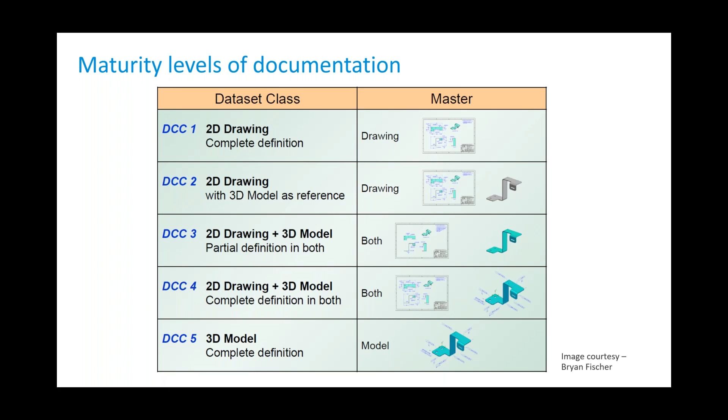So Anton, could you kick off the first poll? Launching the first poll, and do you mind rating your approximate level of GD&T adoption? The options go all the way up to full adoption of GD&T technology. Please just click on the screen, and I will share the results in 5 seconds. Okay. About to end the poll, and here are the results for everyone.

So as you can see, mostly the audience is in early stages of the journey. So probably it makes sense to also say a little bit more about what it is, how it works, and how to get on the path. Certainly, yeah. So I'll talk about that real quick, and then we'll move into some of the definitions.

GD&T, as we understand it in America, is geometric dimensioning and tolerancing. In the ISO standard, and in Europe, I believe it's referred to as GPS. But basically, rather than traditional dimensions and hole notes and so forth, it's symbolic-based tolerance specification, and that technique using GD&T has a pretty long history and a pretty robust set of standards behind it in both ASME and ISO.

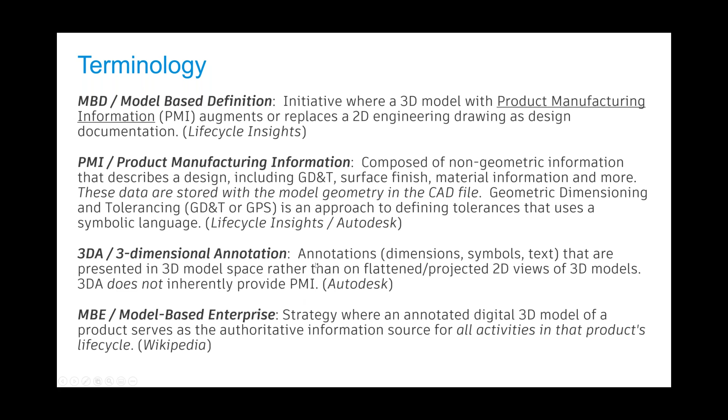So just a quick history of how Steve and I have been contributing to the MBD solution during our time here at Autodesk. 2005 was the first time that I ever heard the term 3DA, or understood it as a priority from our business leaders. And we actually spun up a team in 2005 and started investigating where the industry was and what our customer requirements were.

And like a lot of projects outside Autodesk, that project was started and then scoped really before it ever got going. But we did learn that we wanted to be able to give users the ability to manage 3DA visibility and camera views, save camera views using view representations as was available in assembly.

So as a result of that initial project, we ended up getting design views put into parts in Inventor R11. The project got started again in 2008 with a pretty sizable team, both Steve and I involved, and that project was scoped before we could ever release anything. Although as part of that effort, the pretty substantial development team was successful in porting over a lot of the annotation architecture and object models that were in 2D and getting them moved into the 3D space. So while we didn't create anything customer facing, we built the foundation for our MBD solution during that time frame.

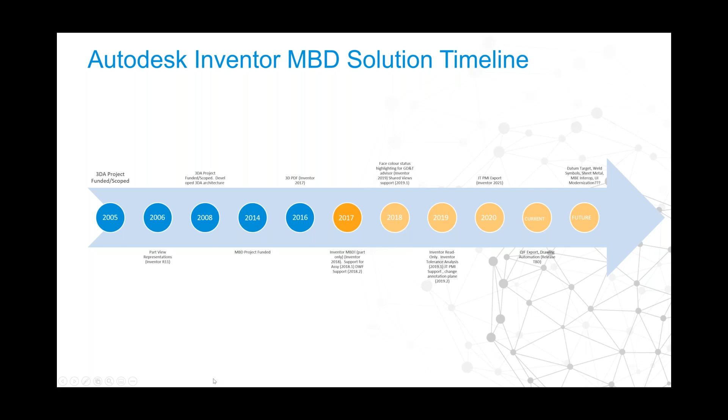Steve, anything to add? No, good overview of the development cycle here. It seems long, but it is long. Yeah. But there is something in the product today. It's usable. Yeah, fully functional.

And it's time for the second poll, just to understand where you are with Inventor's implementation of 3D annotations and MBD. Have you tried it or not? Do you use it frequently? Just click on the screen. I'll keep it open for 5 more seconds and then share the results with everyone. Okay, so I think that we're good. Let me close the poll and share the results. They're pretty in line with the first poll. So the level of adoption is relatively early, right? With just 14% using MBD on a more or less regular basis. Okay, so this is good information for us for the next slides and the accents that we add. Good. Let me give the stage back to Andrew and Steve.

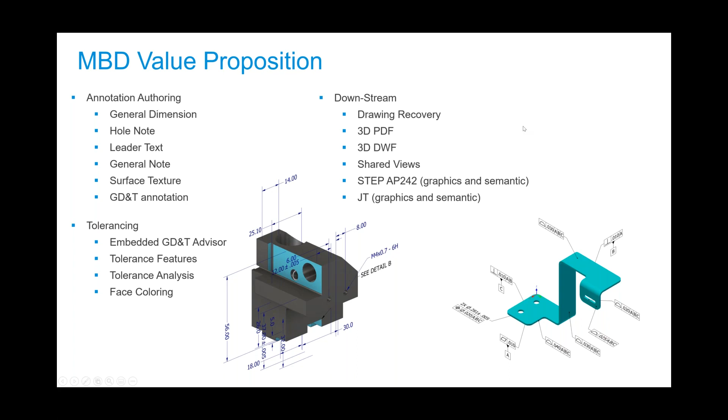So here we are again at the dataset classification code table. I just want to mention that this image here comes courtesy of Bryan Fischer. Bryan Fischer is a GD&T and model-based definition consultant out of the Portland, Oregon area. He's done a lot of training on GD&T. He sits on the ASME board and is responsible for developing a lot of standards around model-based design and model-based enterprise.

So the ASME Y14.100 is basically the engineering drawing specification. It's been around for quite a while and encompasses the MIL standard around drawing documentation. And these details here, Appendix F, were added in the 2013 version. There is a 2017 version available.

I don't have a copy of that, but I'd encourage anyone interested to get a newer copy and review it. This basically acknowledges, from a standards standpoint, that 3D models are a valid replacement for 2D drawings as the single source of truth, your company's manufacturing currency, so to speak.

What we hope to do is provide tools to get you to any one of these classification codes beyond number 2, where I expect everyone is at today.

A lot of people are here because they think they want to go drawingless. Just going drawingless is a big motivation factor for a lot of people who approach these tools. It's really much more nuanced than that.

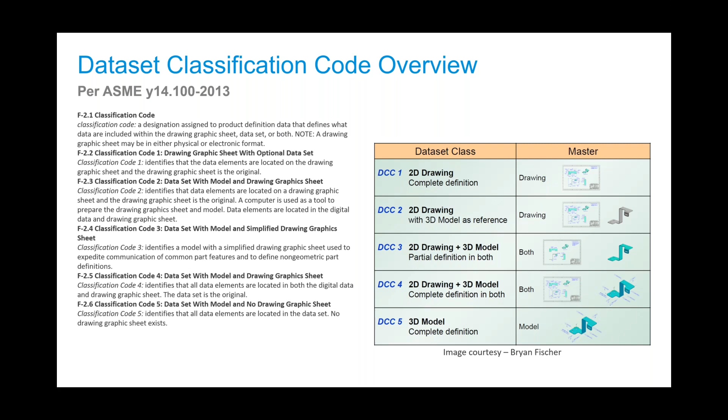Okay, last poll, Anton, if you will. Yeah, last poll based on what Andrew just shared. As an aspiration, where do you feel you want to be, and where does your company want to be, in what classification code or maturity level are you trying to get to?

Okay, good, we're really close to closing the poll and sharing the results. Let me do that. It looks like the biggest percentage of the audience is voting for maturity level 4, which is still full definition in both 2D and 3D. So 2D remains important for the audience.

Good, thank you, no surprise there. That's certainly in line anecdotally with what we understand from a few years of talking with customers, and that's good. Like I said, we are currently investing in making drawings easier to create if you've taken the time to invest in 3DA. Again, thanks for participating in that poll.

I'll wrap up here by referring you to some additional resources if you're interested. Action Engineering is another MBD consultancy, based out of Golden, Colorado. We've referred a number of customers to them. They have a lot of experience with MBD, particularly in the aerospace and defense industry, which has really blazed the trail for MBD adoption in the manufacturing market.

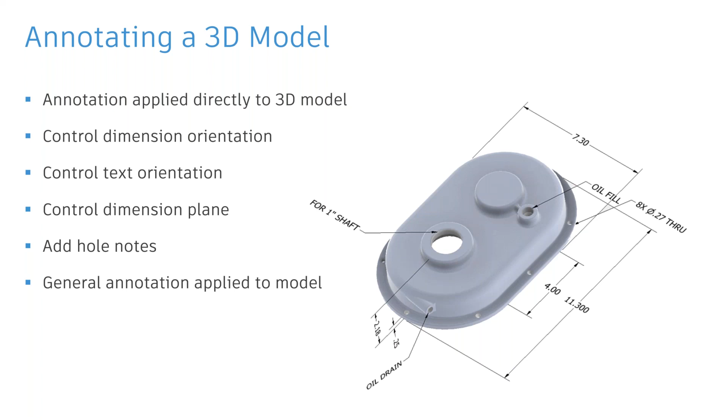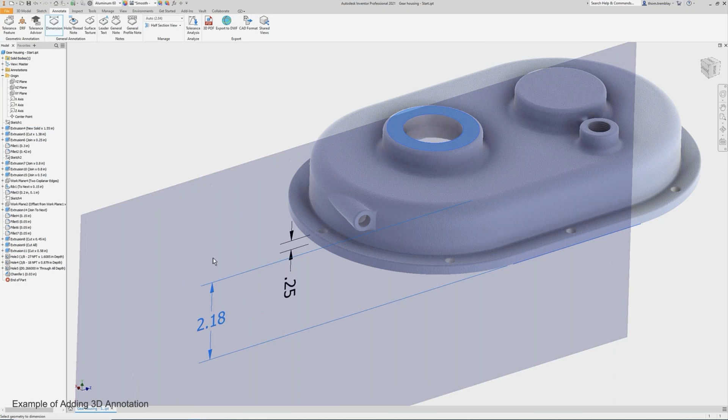Let's take a look at a couple of examples. For example, now we have one dimension. We'll use just the dimension tool from the Annotate tab. Clicking on an edge and a face will give you a dimension, just like you would get in a 2D document. In this case, it doesn't have the correct orientation I want, so there are some right-click overrides when you place the dimension that let you change the annotation plane, or there are keyboard shortcuts. Everybody loves keyboard shortcuts, so I can hold Shift and select the YZ plane, and it will set that dimension in place.

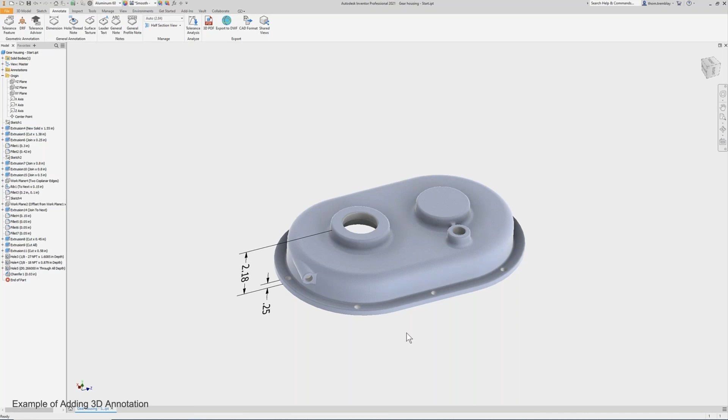You can build these dimensions out, and you can also change the position of them as they're applied. Let's take a look at a couple more examples. Selecting that edge again, we get a 4-inch dimension. Selecting another edge, we get a 7.3 width. So it's going to build these out, and you'll notice we're getting a menu in the upper right every time we place a dimension. We'll take a closer look at that with some other options.

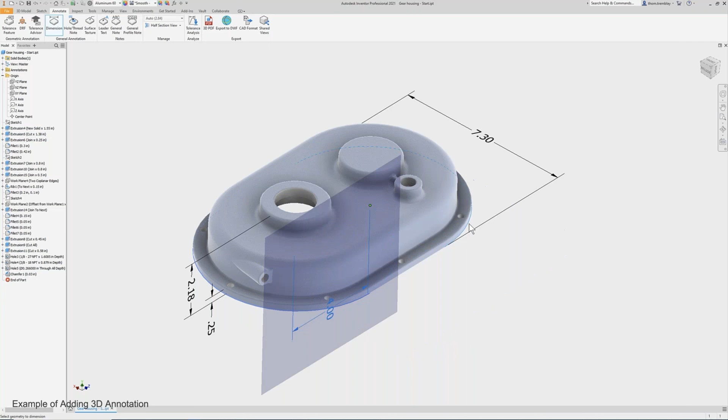Now what I'd like to do is get an overall length, since I'm trying to illustrate this for a customer. I select a curved edge, I get the radius. If I select the other curved edge, it's going to find the center points. Using the Shift key, I was able to change the orientation of the dimension itself, but that's not the dimension I want.

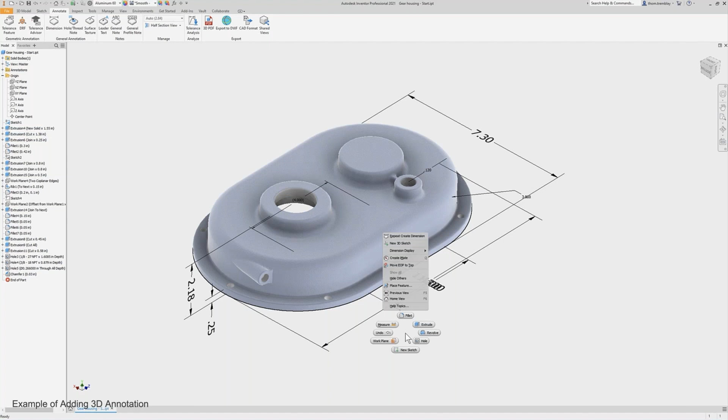However, the dimension I want is available in a sketch. So if you access your parametric sketches, you can promote dimensions directly from the parametric sketches into the 3D annotation. So while there might be some limitations and still some room for growth in the 3DA tools, they're giving you access to the intelligence built into the original design in the first place to help you continue to develop.

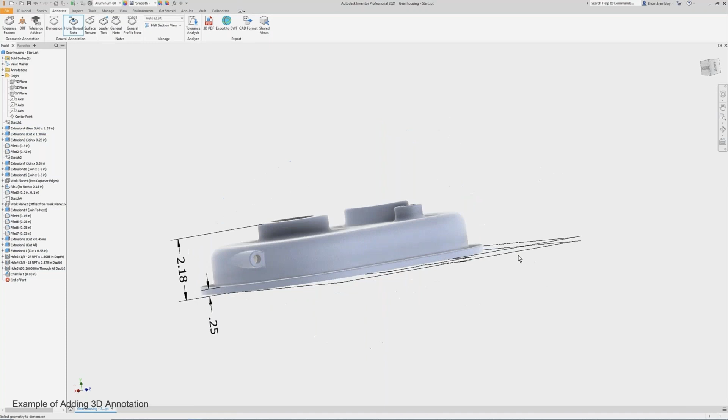There are a lot of other tools, such as hole notes, where you can select the hole, and not only will it give you information about the hole, in this case, it's even giving you the hole count.

So once again, the parallels to the 2D documentation are there. However you want to visualize the annotation on the model in 3D, you're approaching it very much the way that you would in 2D, but everything's in one place. You're not having to flip from view to view to view, and maybe even from page to page. It makes it much nicer.

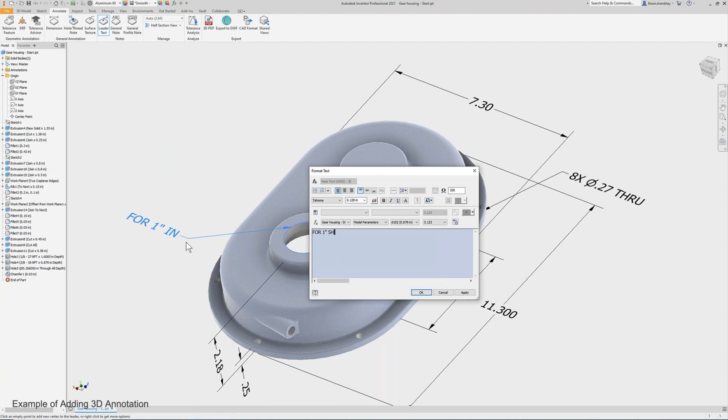Now, later on in this course, we get into the ability to build out design views to limit what annotation is available, and that can translate into a shareable file as well. So it makes it very nice. So again, just regular leader notes, really nice, clean way to share your information with others.

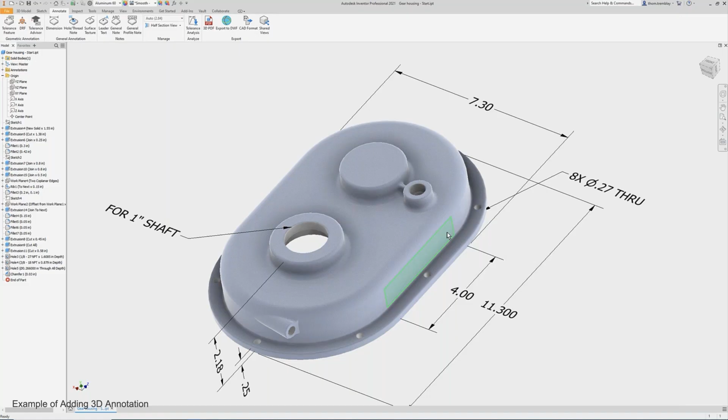And I don't know if you noticed, but as the model was rotating, the text always remained legible. So when you need to get into the more manufacturing oriented, the more product development oriented side, that's when you're going to get into GD&T, using features to place dimensions rather than just using edges.

You can add additional callouts to a specific dimension. You can incorporate fits or tolerances, however you need to do it. And the tolerance advisor that was mentioned briefly before is an incredibly useful tool, as it will guide you into what else your model needs for definition.

So here we have a model that's pretty much just at the 3D annotation stage. We'll apply a primary datum by selecting the bottom face. Again, up in that upper right corner, we get the information around what that definition is.

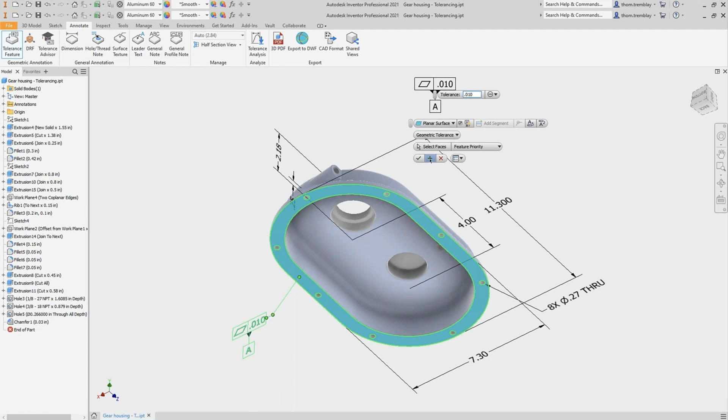You can go up and tell it whether or not you want to apply a datum to that. You can choose which profile callout or which control you want to apply your tolerance to. You can also make other modifications and then just apply it. Now, as soon as you do that, that's when the tolerance advisor will appear.

It will let you know there are some external dimensions that were applied, that's that 11.3. One or more of the surfaces is unconstrained, which makes perfect sense since so far we've only really constrained one surface. And now not all of the degrees of freedom are constrained because we only have one datum. So this model could be spinning about, it could do all sorts of things.

And the datum that we do have is not referenced by another dimension. So just kind of having this reminder up in the corner that you can use as kind of a sanity check, to make sure that as you're applying information to this model, that you're doing so in the correct way.

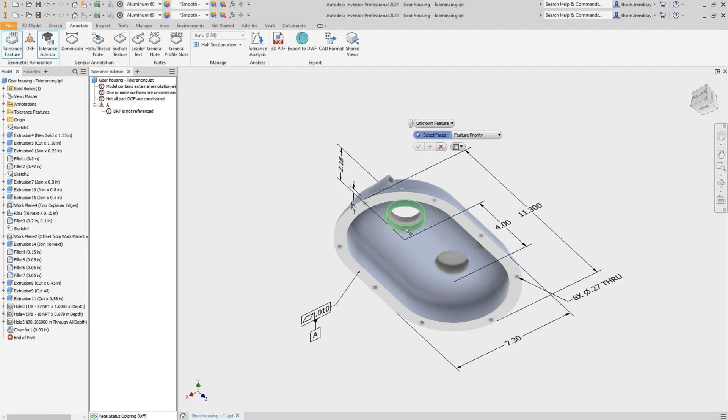So we'll use the tolerance feature, and we'll drop this in. You'll notice that the fit is already in place. That comes from that feature.

So if you apply individual tolerances or fits to your features in your 3D model, the 3D annotation is capable of extracting that information and bringing it directly in. You'll see that it's also applying a datum to this feature. You can set up the tolerance and make any other changes that you need. We'll apply that one, and then I think we're just going to do a couple more.

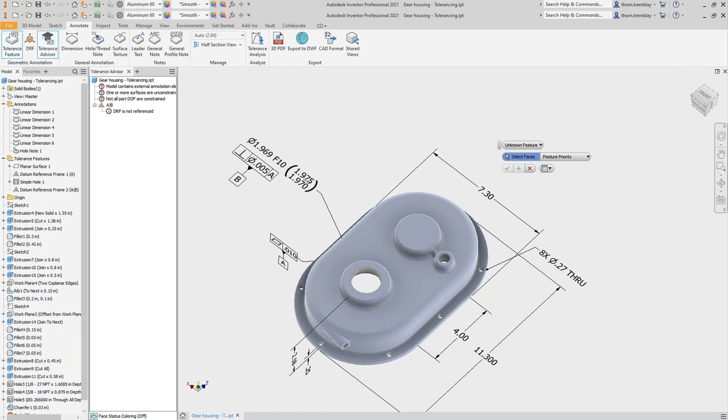You'll see that the reference to A has been removed from the tolerance advisor not being referenced, but now there's a reference to A and B. So as you continue to add features, it will continue to collect. Of course, you can go into any of these features and make modifications to the individual tolerance for the controls or for the dimensions, and that's as simple as clicking on the element that's on the screen and making the modifications.

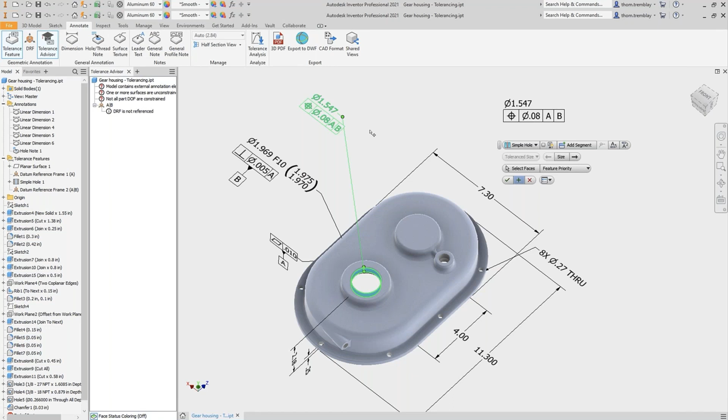All right. I missed a slide here. Pardon me.

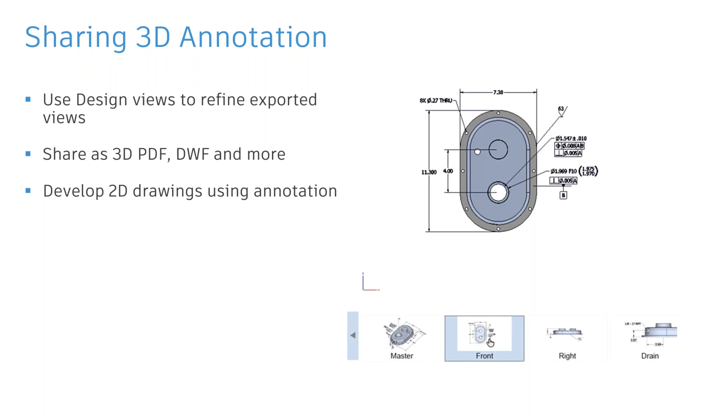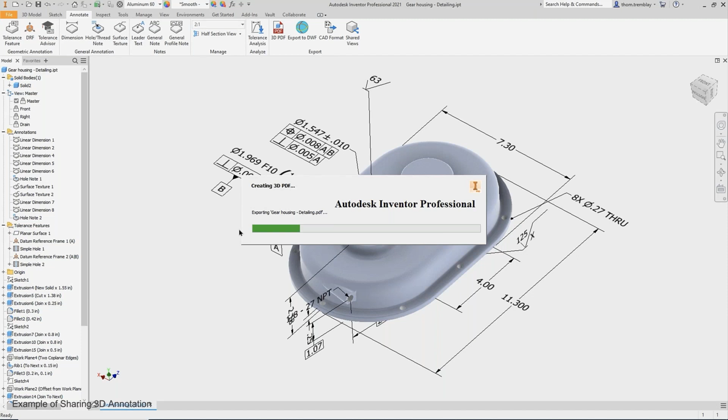So let's take a look at how some of this works. So we have created a series of design views, front, right, drain, that limit which annotations are part of them. So if we go to create a 3D PDF, we can choose which views are included, what metadata is included, so you can choose how much information you want to give to the person who's going to be consuming this.

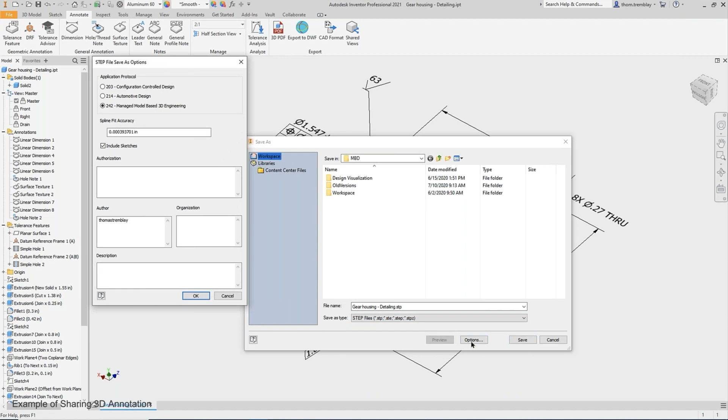You have the 3D view. You can also have the customer pick these other views, as well as influence the look of the model. But by picking between these views, you see how you can define how customers or consumers will be seeing what the data is. And of course, we have the ability to export out to STEP. And now that there's an enhanced version of STEP that takes 3D annotation into account, we're able to access that as well by using the 242 standard. Okay.

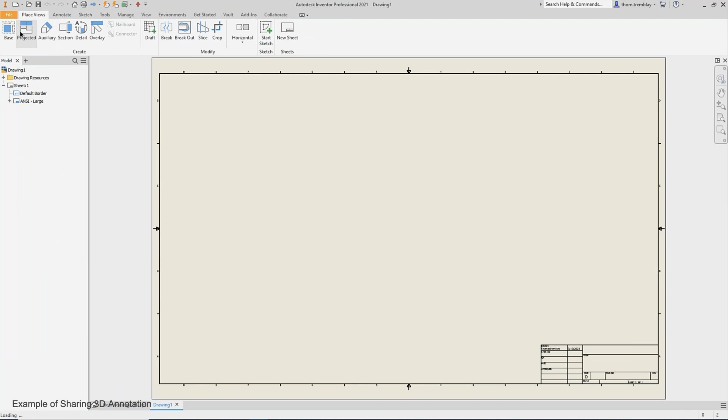Once that's exported, let's take a look at leveraging the 3D annotation in 2D. So we'll begin to create a new drawing. And for those of you who've been using model dimensions, your sketch dimensions in drawings, this workflow will be very familiar. So we'll rough in a location, we'll place a view, and then we'll retrieve the model annotation. But there's a 3D annotations tab now.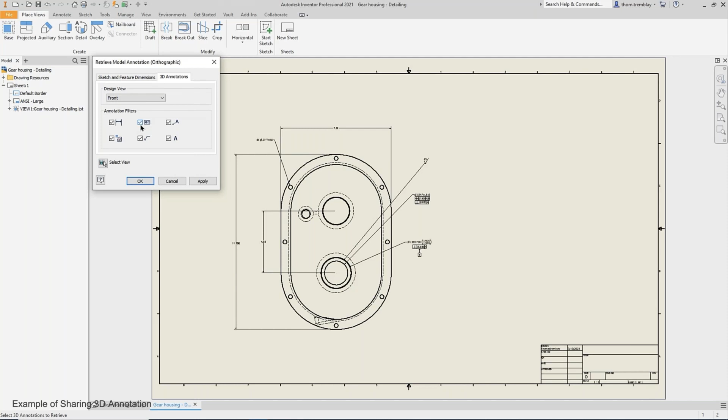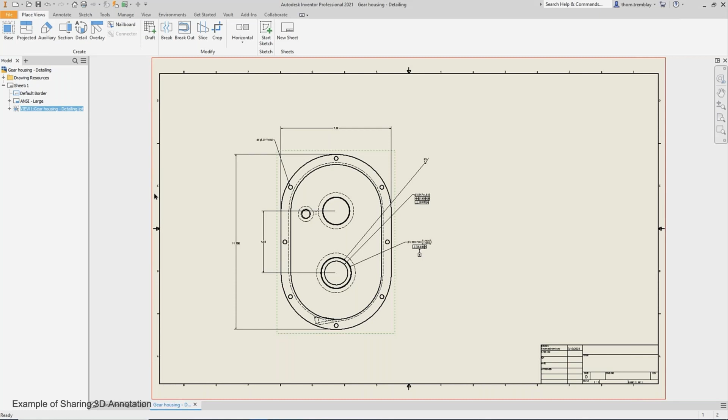So we can choose whether or not we want to include hole notes, dimensions, any surface callouts, any datum references, or any GD&T references. And now you've taken all of that information that you built into your 3D annotation model and just used it to detail out your 2D drawing view. So saving a lot of extra effort. So for those of you who want to produce, and that was the majority, both 2D and 3D, there's your answer as to how you can reduce your amount of work to do both.

Then finally, the last thing we want to take a look at, or that's part of this course anyway, is tolerance analysis. It's included for the Product Design and Manufacturing Collection users. It can leverage assembly constraints, or let's say you have to do a tolerance stack for something you're purchasing and you want to review it, or perhaps you're creating a component in the context of another design, or maybe you just didn't assemble the components in a specific way. You can build out your tolerance analysis.

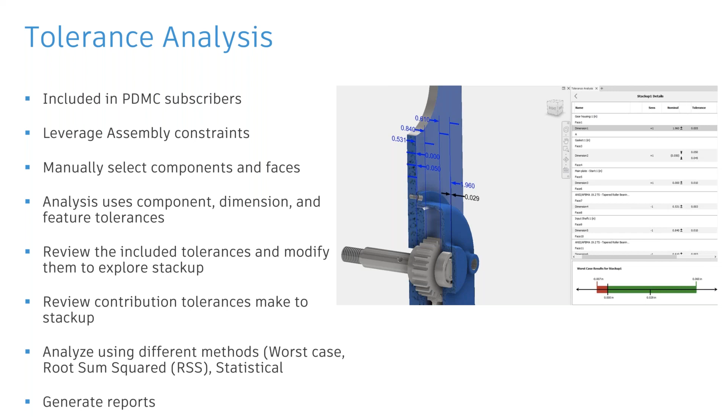It can extract information from the components, so tolerances that are built into the features of the components, or it can also extract information in the 3D annotation. It gives you the ability to take a look at your components in context and see what's possible and analyze what's going to happen with these components using a worst case scenario, the root sum squared model, or different statistical models. So let's take a look at that.

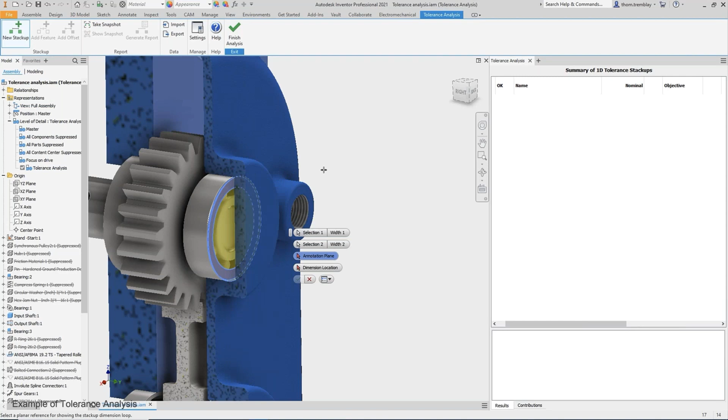So here in an assembly, we've gone into the tolerance analysis. We'll say that we want a new stack up. Now, the one that we'll use here is the shaft and bearings constrained between the cover, a gasket, and the main mounting plate using Inventor constraints. So we can choose the initial faces that will be the basis for the analysis. We'll select the annotation plane, and as always in Inventor, you want to follow the red arrows that will let you know what's expected next.

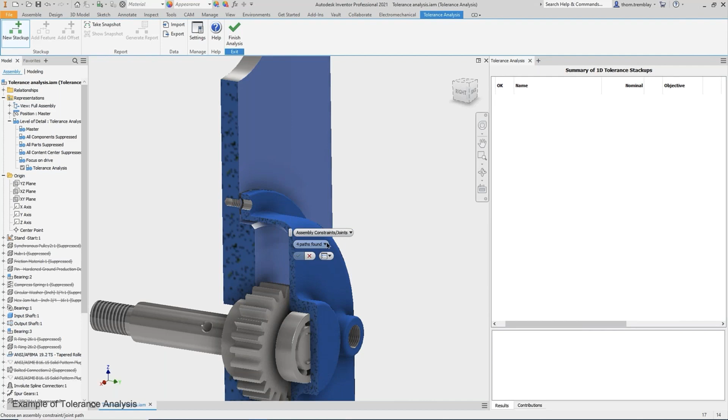We'll place where that dimension location is. We can either use those assembly constraints and joints, or we can start using the select approach instead if you want to pick individual components and constraints. Here it's found 4 different constraint paths. Because of where I want to place the annotation on the model, I'm going to use the one at the top that uses the top references and then have it place those tolerance stacks. So in the panel on the right, you see in the upper section, there's a pane that shows all of the tolerances that were referenced in this stack up.

At the bottom, it shows us the results. And at the bottom, in this case, at the moment, it shows that we have a lot of potential for issues. So what we can do in this, and this is why this is so powerful, is first we can go back and look for things, maybe on the purchase components, that really aren't going to be that loose. So we'll take some of that slop out of there.

And then we can start taking a look at the individual features of our models where perhaps we applied a tolerance without thinking about it or not really sure what we wanted. So we just roughed something in, and we can go back and start modifying it and saying, okay, if we make this part just a little bit more expensive by making it a little bit more precise, what does that do to the assembly?

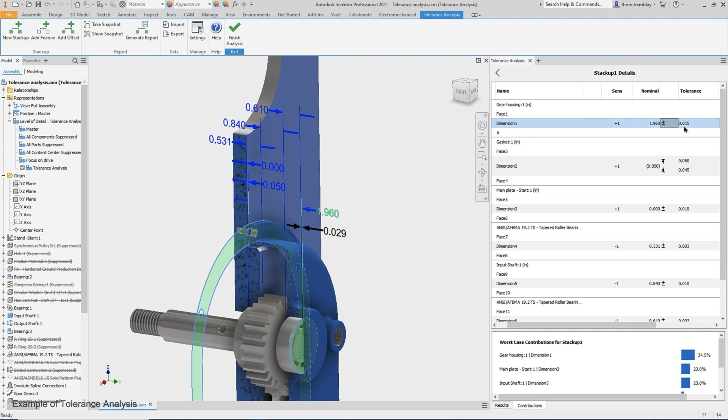Or can we loosen up other components, make them more affordable to build, and still get quality results? You can see which of the constraints or which of the tolerances are contributing most to the stack up and go in and make modifications. You can change the classification of tolerance as well as the value of the tolerance.

And once you've got a feel for how your assembly is going together, you always want to remember that there's other ways of looking at it. So this is worst case. If you want, though, you can change from reviewing your worst case to, in this case, let's go to a statistical. Well, this is the RSS first. Then we'll go to a statistical, and we'll go for the percent of yield.

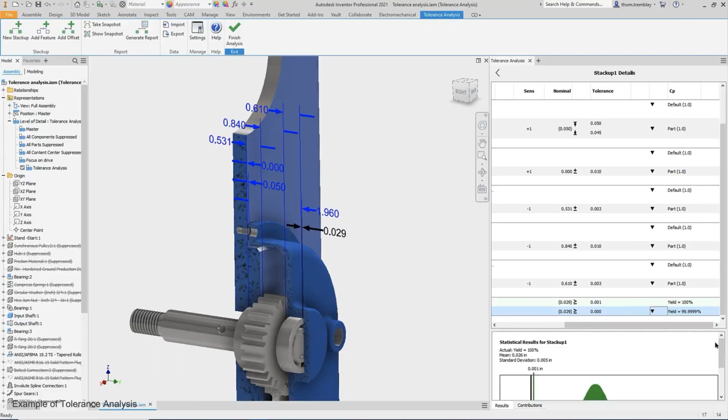So if we start making these parts, what percentage of them, if we just grabbed them out of a bin, would go together based on the tolerances we have? And right now it's 99.9999% that would still be able to work for our design. So excellent results there.